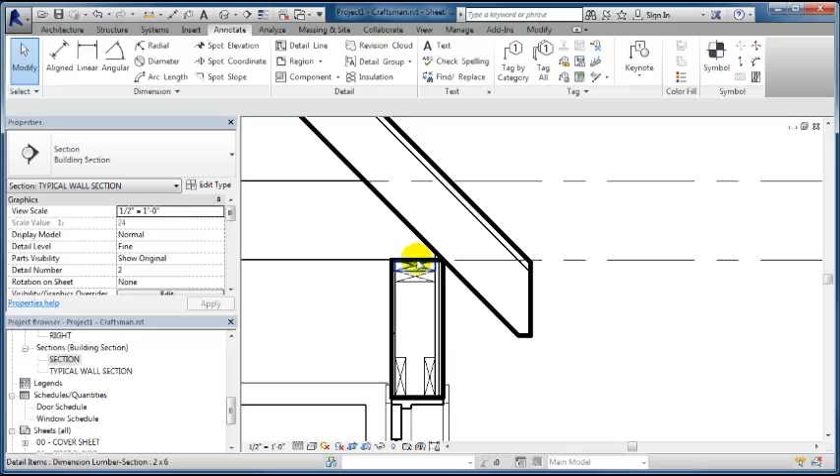Alright, so we're picking up where we left off here, and I see that I've got some things I want to fix with where roof lines and things like that are. This roof rafter should really notch out somewhere around 1.5 to 3 inches over this top plate.

So I'm going to select the roof and offset it from the base. Let's try -4 inches to begin with. That's about right, so now we're seeing it notch and wrap around the wall.

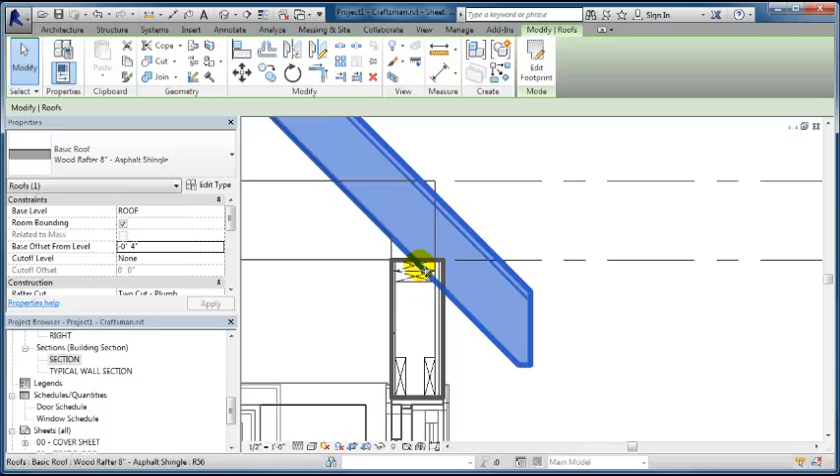If we join these two pieces together, if I hit join and select the wall and then select the roof, you should end up getting some kind of configuration like this, which is perfect. So this is showing us how the rafter would notch around.

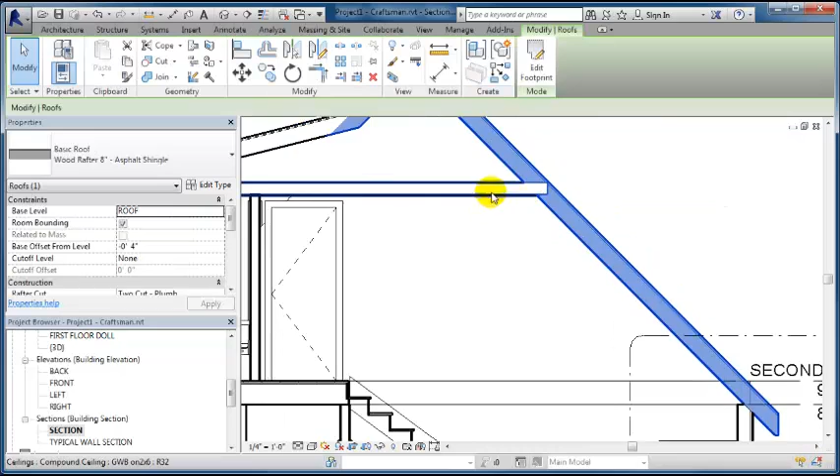Now, since we've done that, it's probably not a bad idea to check out our section, in particular things like that. Since we dropped the roof, that collar tie, I had a suspicion it might stick out a little too far, so we'd have to edit the boundary and make adjustments to the length on this side. So just remember to go check what effect that had on the rest of your model.

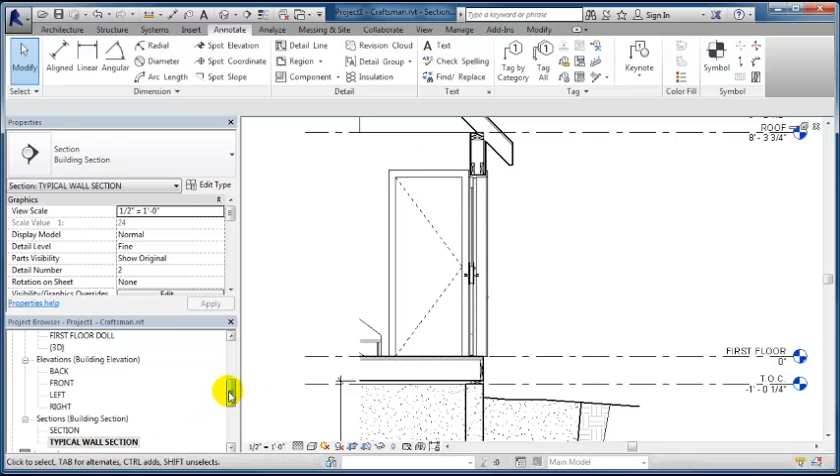So back to the typical wall section. Notice I'm in the view now. I can do this through here, or through the section view with the view active. I don't believe the view is active anymore because I left the page, but you can do that in either location. So let's go back to that typical wall section view.

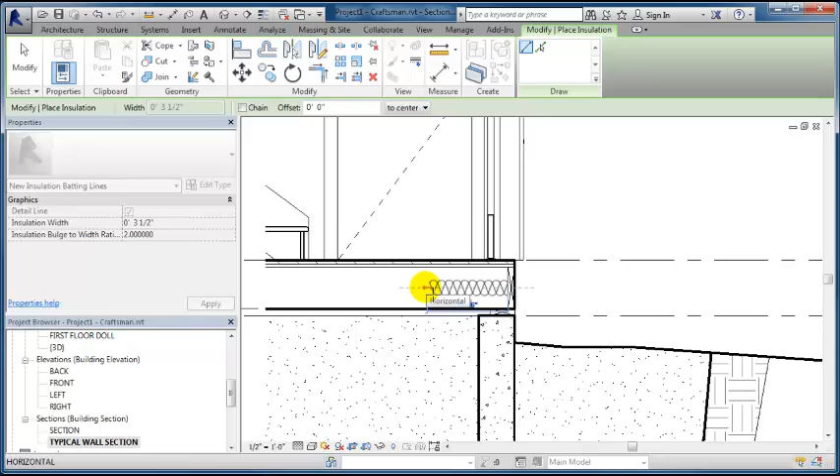And I'm going to add insulation. The insulation would be in this cavity right here. We have an insulation tool, and we'll put that insulation so it's centered on the rim joist, dragging it out a certain distance. The insulation isn't the right size, but if you click on it you have the width set here, so I want to set that to the same size as the floor joist, which would be 9 1/4. That fills that space. Up above, we're going to have insulation here.

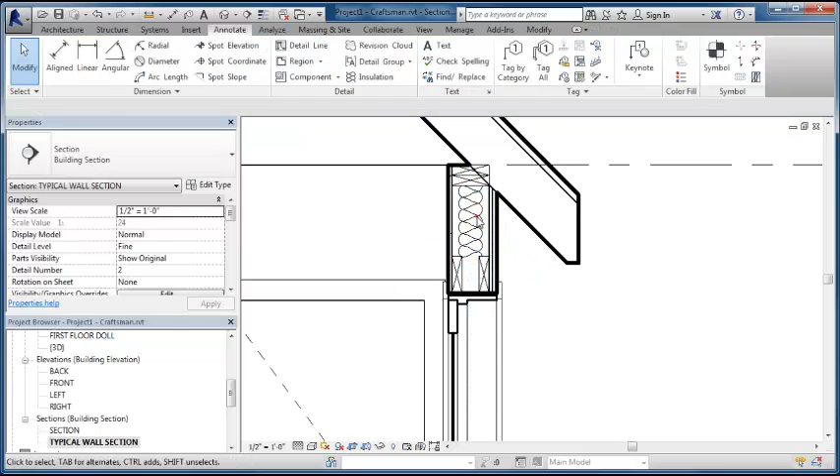I'm also going to show insulation stuffed in between the header, so I'm going to use the insulation tool to go from here to about here. Select that and change it to 5.5. And then I want to create insulation from here up to here, which should be at 2.5 inches. That would fill the cavity.

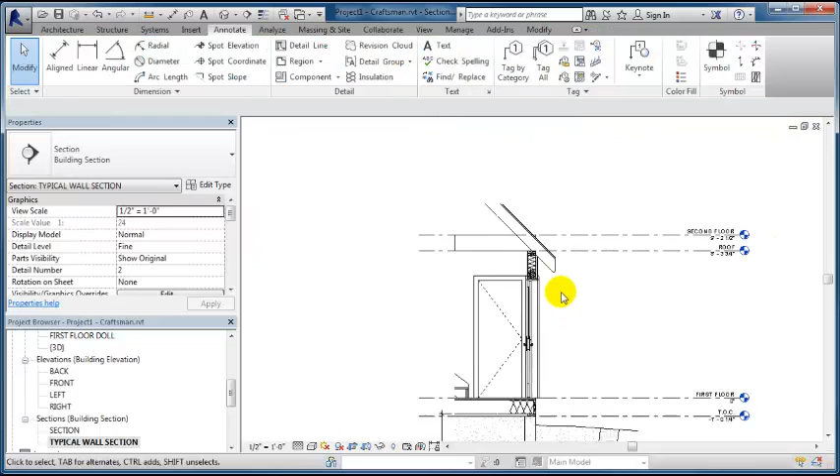If it didn't land quite in the right place, use the arrows on your keyboard to nudge it where you need it to be. Then insulation would follow along this roof line all the way up to the collar tie, so I'm just going to have that go part of the way. I'll pick somewhere, eyeball a spot in the middle of the rafters - we can move it after the fact. Just drag that beyond the crop region, then select the insulation and change that to 7 1/4.

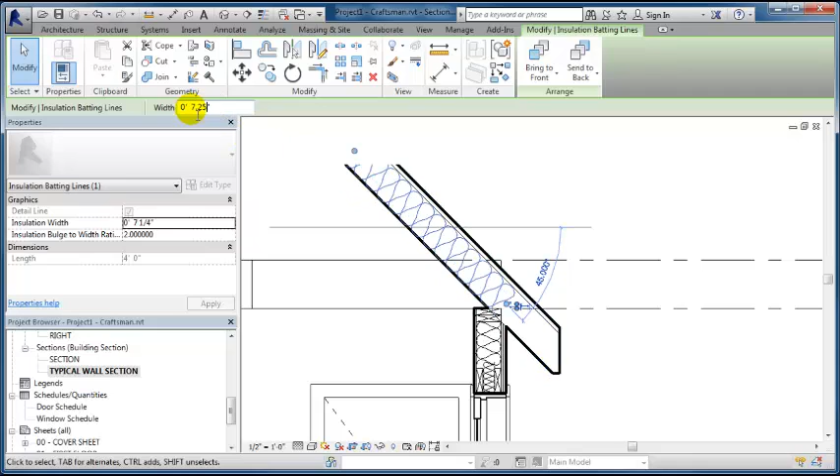When we get into the customizing portion, we are going to be customizing this rafter so it does have gypsum wallboard on the underside, and we'll be able to extend this gypsum wallboard up. So we're not going to worry about that now.

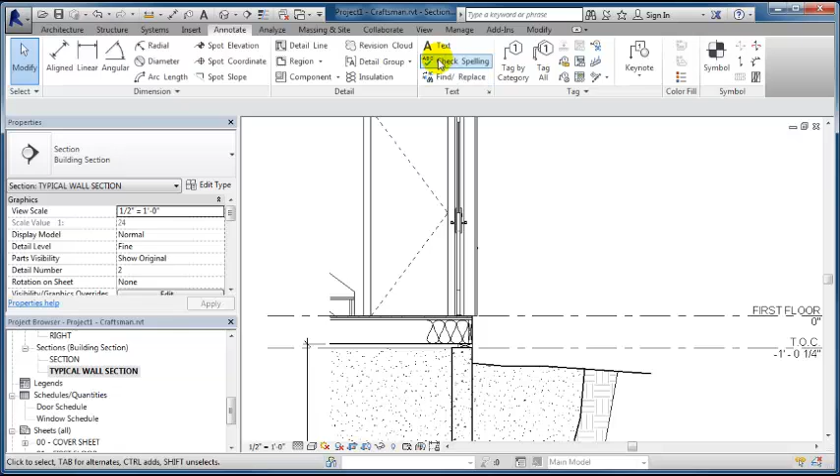Alright, now that we've got all the detail components in here, we can go ahead and add the rest of the annotation, and you know how to do that. You're going to go to the text tool and just start pointing to the things you want to indicate. So this is a 2x6 mud sill. Oh, make sure we have caps lock on.

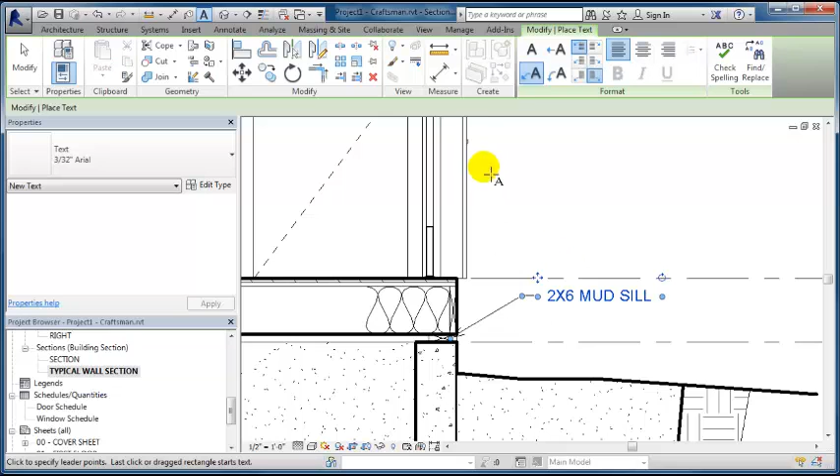We may want to point to the intersection here and indicate that we want to see sill seal. You can type right on the joist the size of the joist - that's a good spot for it. 2x10s at 16 inches on center.

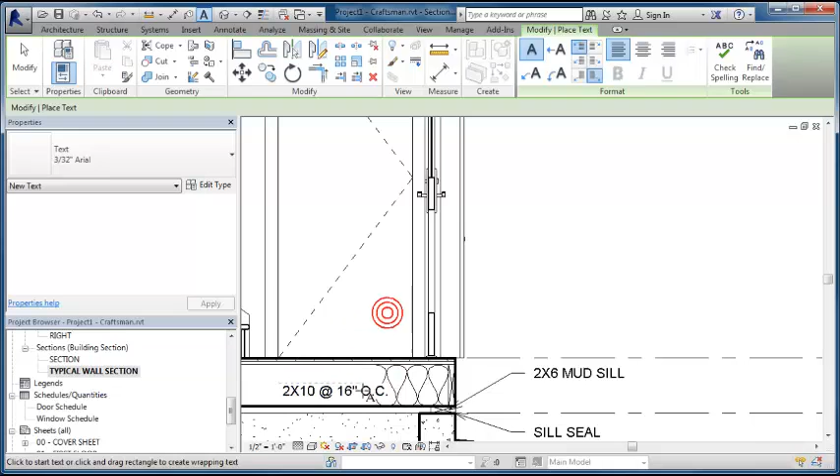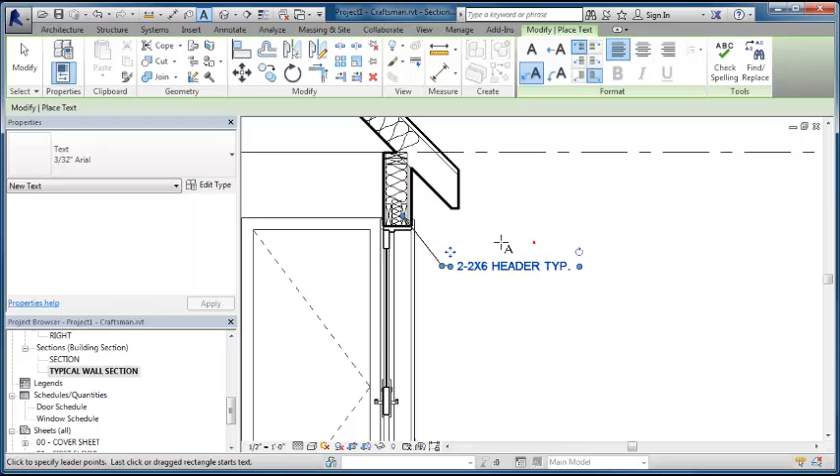We haven't looked that up yet, I don't believe, so if we have and it's something other than that, go ahead and type in that note instead. We can indicate the size of the header, and if that is typical, go ahead and write typical; if it is not typical, then don't. So 2x6, and then we've got 2x6 top plates.

I do like to point out we've got here door and frame beyond. And then we could make a note here that's a general note because we don't have anything to point to.

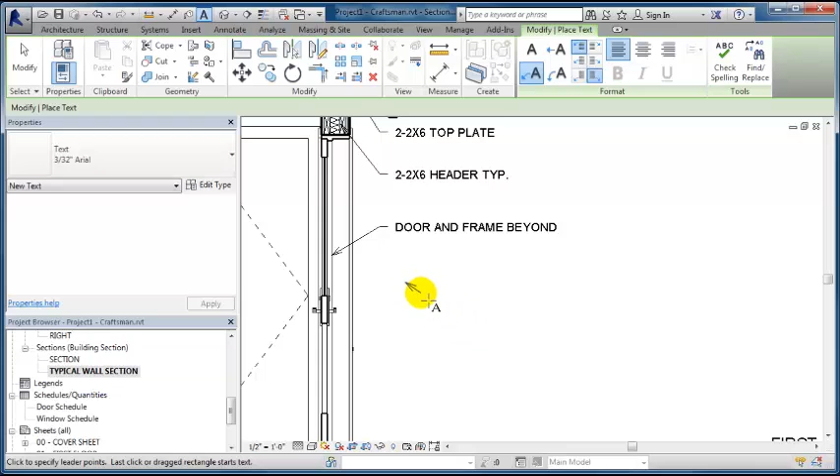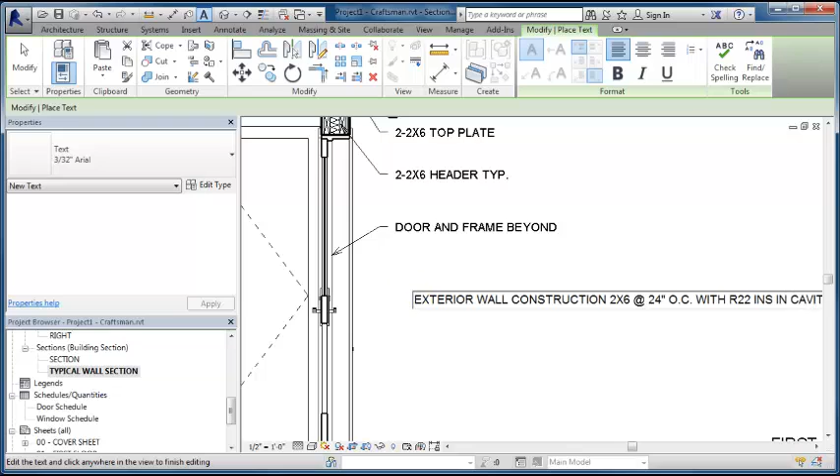We can just say: exterior wall construction, 2x6 at 24 inches on center with R22 insulation in cavities, 1-inch insulated zip panels, and insulated composite siding.

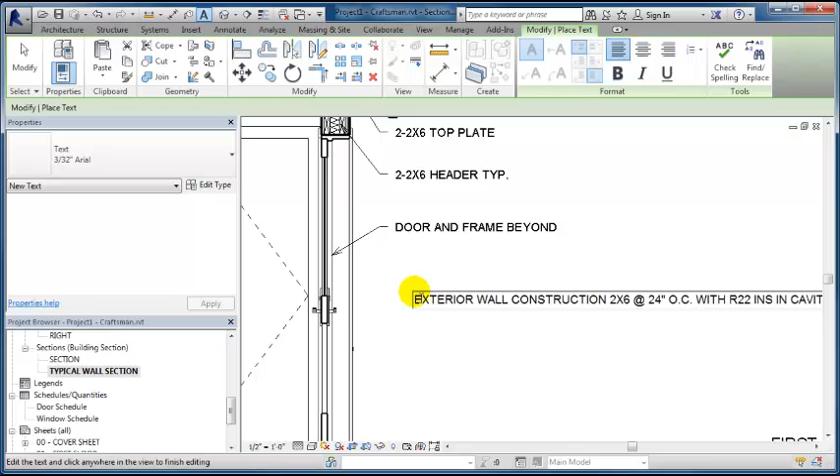Now there's one of those warnings again, and I just kept typing because I'm going to turn off the crop, and that way I can grab it and bring it over so it's within the crop region and then just crop it again. So it's better to do that instead of trying to enter.

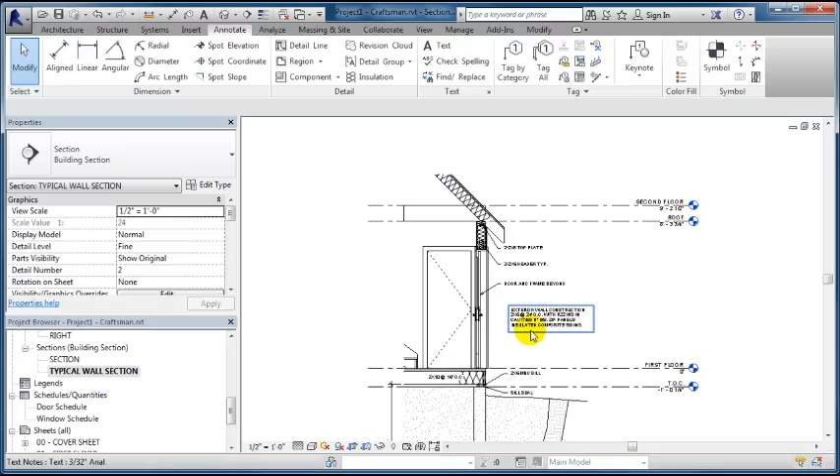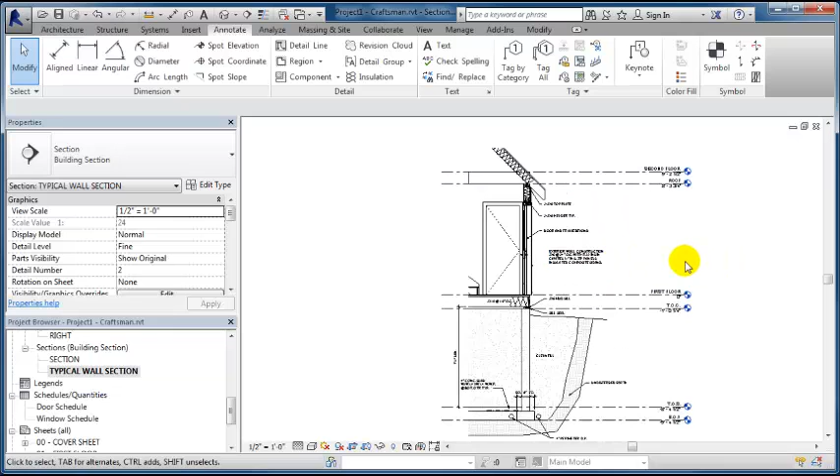So now we've got a pretty good handle on what's going on here in our wall section as far as typical construction goes. If we wanted to see any interior wall construction, we could do another detail, or you could do that on the main building section. But this gives you an idea of how we can fully annotate.

Now in the next video, I'm going to show you how we create actual topography in our site instead of doing all this stuff with detail lines. That's more involved, so I saved it for the second part. Usually it's something you do when you know where the building is going to go, and you can put topography information in place if you have GPS points, for instance. So go ahead and take a look at the video on topography, and that way you'll see a different approach to how we can handle this area.